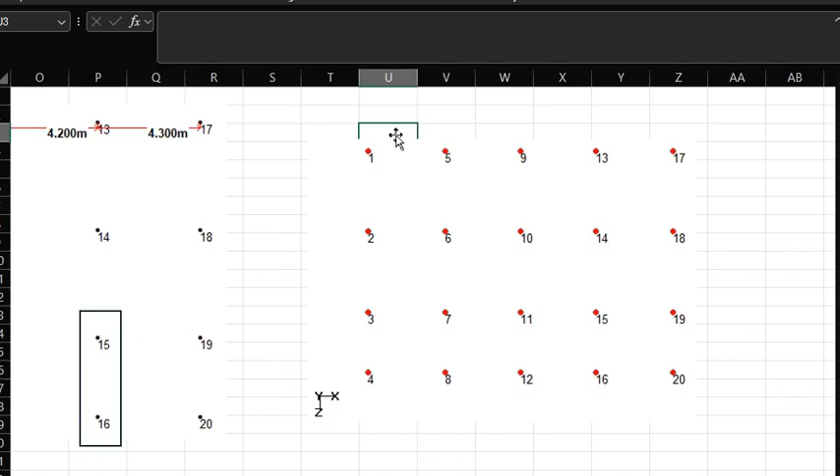Hello guys, so meron tayong foundation dito or footing reactions. So ito yung mga nodes, and then ito yung kanyang footing reaction. So mapapansin nyo, wala siyang moments.

So this is node 1, node 2, node 3, so forth and so on. And then ang kailangan natin dito yung vertical reactions. So ang dead load, dalawa yan, kasi yung dead load 1, ito yung self-weight. Tapos yung dead load 2, ito yung mga superimposed dead loads. So, ang dead load is actually the sum of these two.

And then, ito yung live load. And then, ang kukunin nating reactions based on earthquake is yung positive lang. In this case, ang kukunin natin dito ay yung 115.

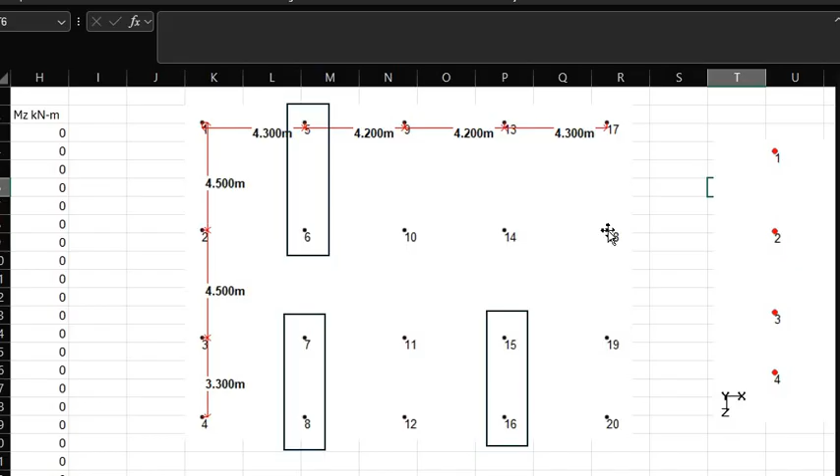Ngayon, ang ipapagawa ko sa inyo is tatlo, which is nodes 5 and 6. Si node 5 and 6, that is 4.5 meters apart, center to center. Kaya, ito ang pinakamahaba, 4.5 meters. Samantalang si 7, 8, saka 15, 16, 3.3 meters lang.

And then, ang condition dito kay 5 and 6 is, siya ay itong line na to, this is property line. So, ibig sabihin, yung column dito sa node 5 is nakadikit na sa property line. So, meron tayong edge footing dito. Ngayon, ang gagamitin nating footing dito is obviously strap footing. So, ang strap footing natin dito sa node 5, this is obviously edge, and then bahala ka na dito sa

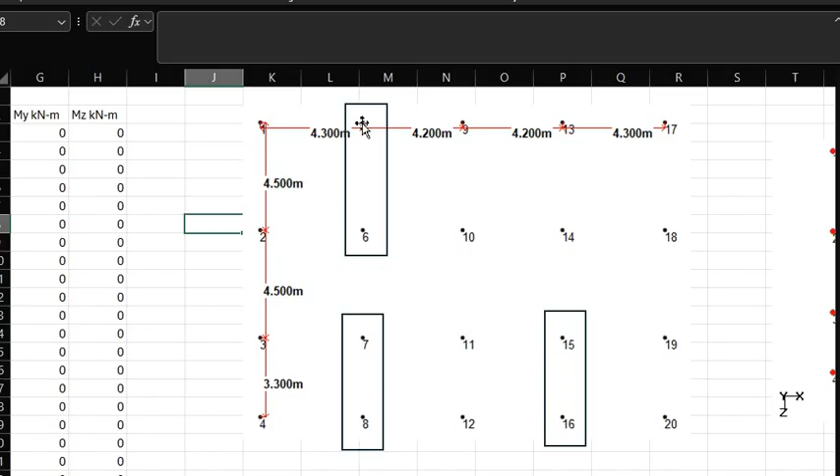node 6. And then, dito naman sa node 7 and 8, okay, eto siya. Ang gagamitin natin dito is combined rectangular footing. Okay, ngayon, ang limitations ni combined rectangular footing is dito sa node 7, ang maximum

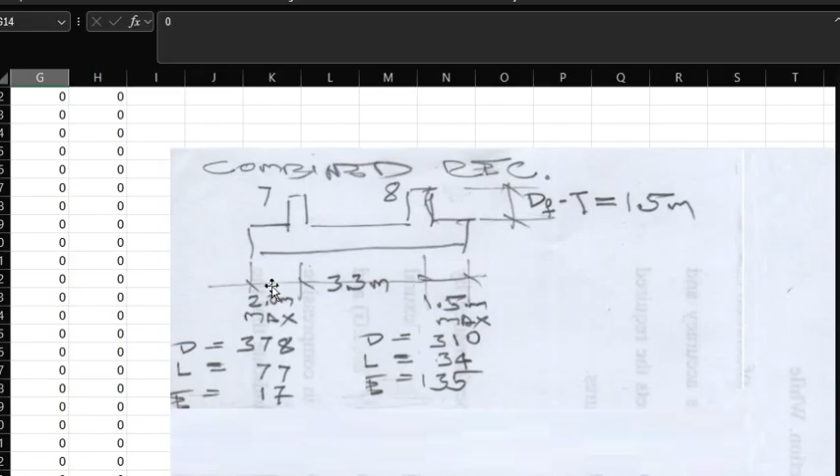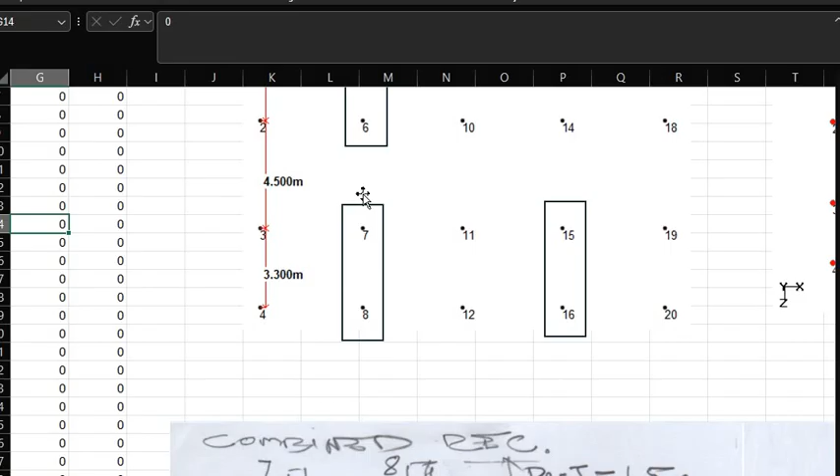dimension mo is 2 meters lang. Kasi dito sa 7, between 6 and 7, meron kang 4.5 meters. Okay? So, ibig sabihin, 2.25 yung gitna nito. So, nilimit ko lang siya ng 2 meters.

And then, dito naman sa node 8, somewhere here, ang maximum mo from center of column to edge of the footing is 1.5 meters lang. Okay? And then, between 7 and 8, column 7 and 8, you have 3.3 meters.

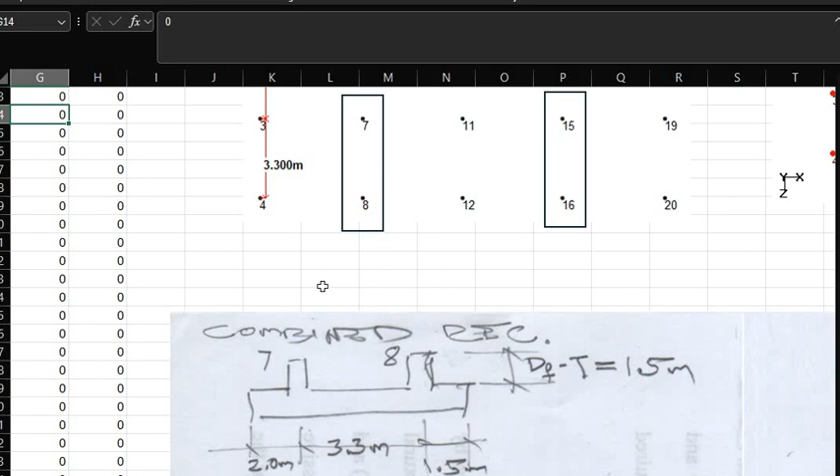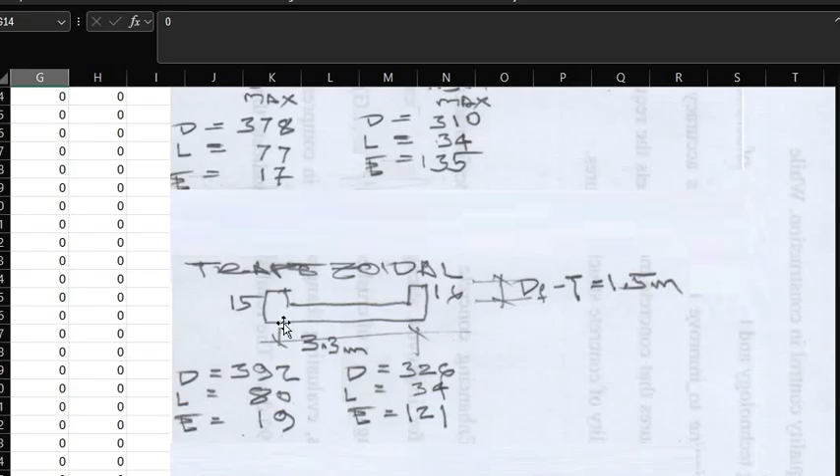Tapos, dito naman sa 15 and 16, ang gagamitin natin dyan ay trapezoidal footing. So, ang trapezoidal footing is both ends are edge footings. So 3.3 din yan, between 15 and 16, that's 3.3 meters.

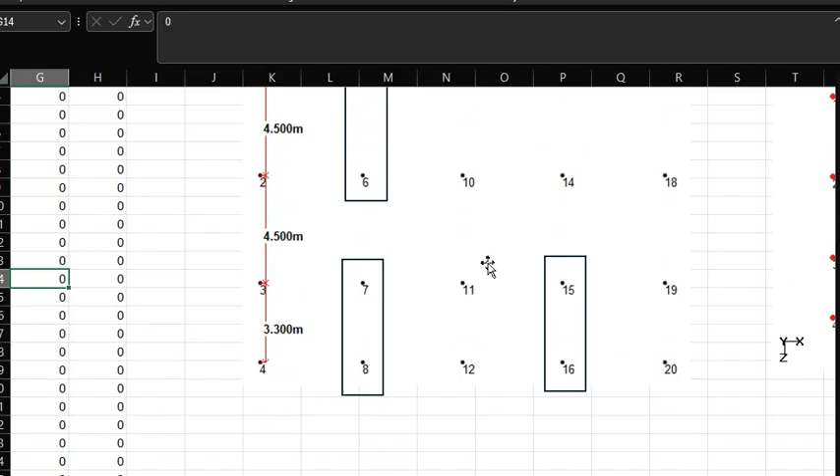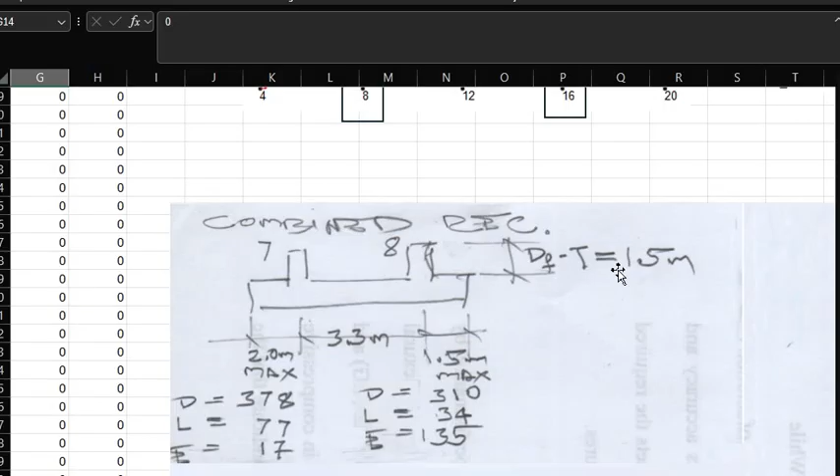And then in all three footings, mapapansin nyo na ang kanyang df minus t, ibig sabihin nito, excavation depth minus thickness of footing is 1.5 meters. So pare-parehas yan na 1.5 meters. Sa combined, trapezoidal, and sa strap, pare-parehas yan na 1.5 meters.

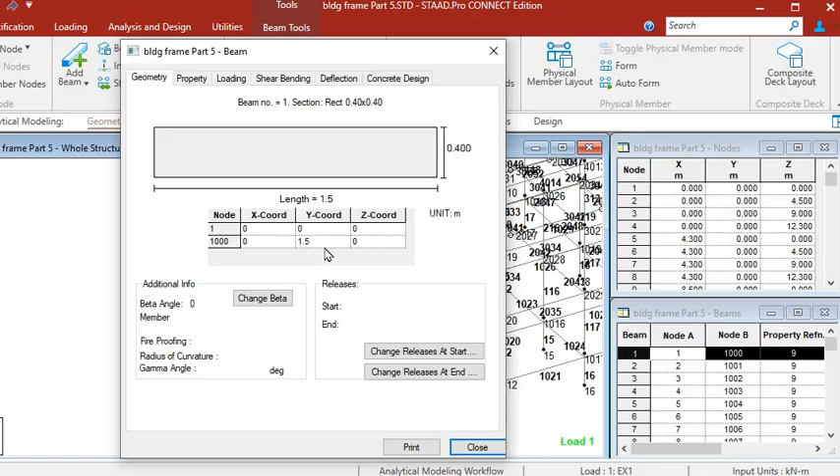For the reason na, ito yung pinagkuhanan ko ng reactions. Let's look at the height of this column. Ayan, that is 1.5 meters. Ang ibig sabihin yan, from the top of this beam up to the support, yung support na yan yung top of footing. Kaya, yan yung ginawa kong 1.5 meters. And then, ang assumption natin dito, lahat ng top of footing is on the same level.

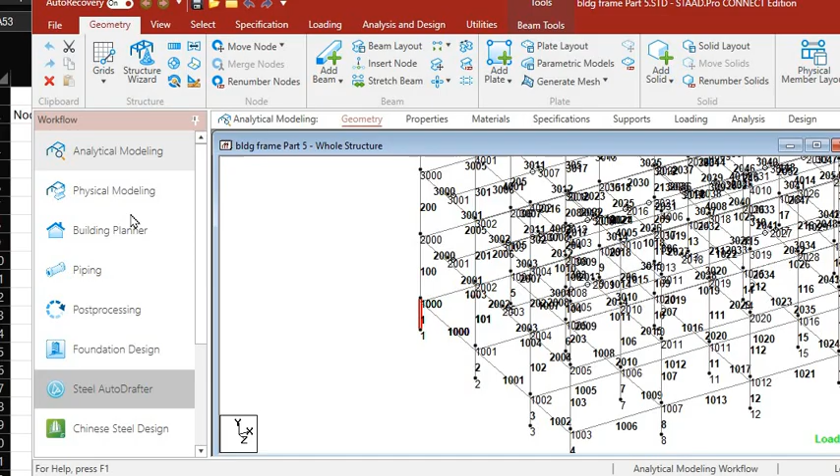Okay, so, pakita ko lang kung paano ko in-extract yung mga reactions na nanggaling dito. Okay, so paano ko in-extract yan? Dito sa post-processing. And then, reactions. Tapos,

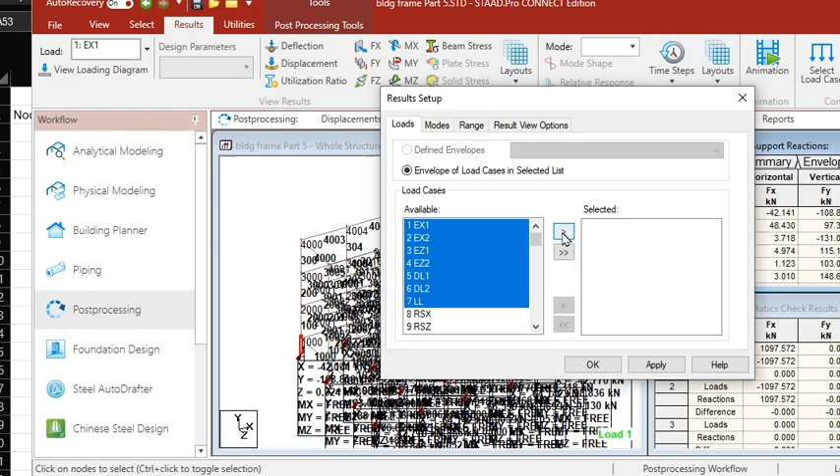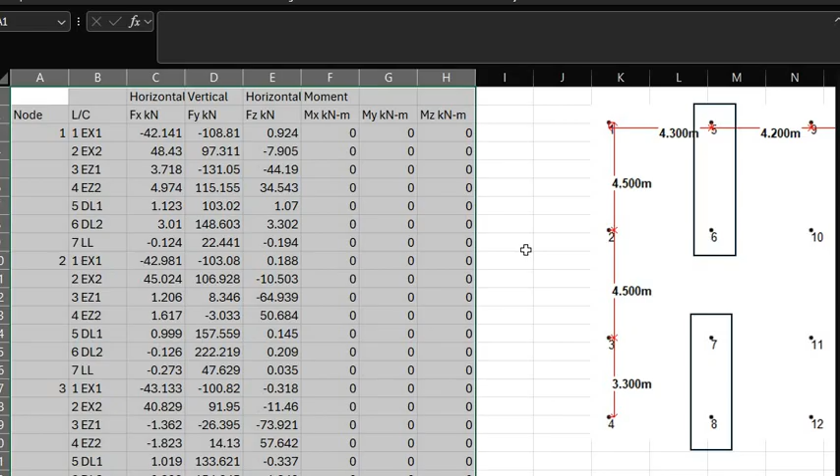result setup, and then double arrow left. Ang kukunin ko lang is EX1 hanggang live load. Yan lang. And then, single arrow right. Then, okay. Tapos, eto na yon. After that, you just copy that. And then, ipipaste ko na dito. Yan na yon. Okay? Now, let us extract or paano ko nakuha yung mga loads na ito, dead, live, and

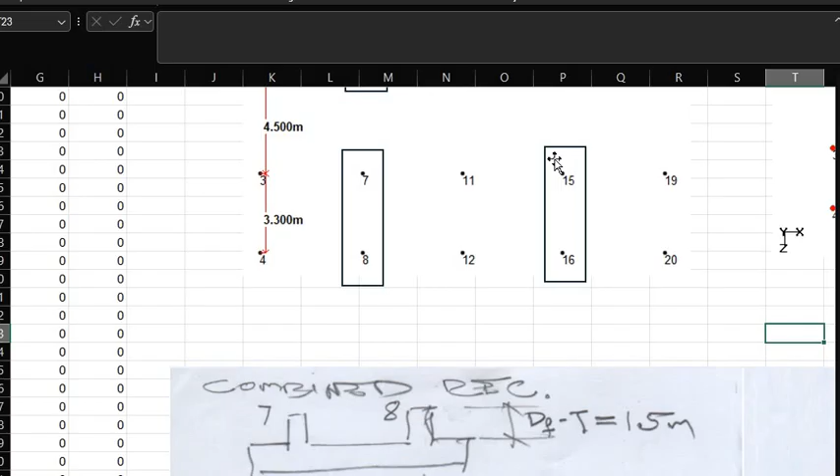E. So for trapezoidal, so that is nodes 15, 16. So ito si node 15, 16, ano? So punta ako ngayon kay trapezoidal. Dito kay node 15. Ayan siya. So, ang kukunin lang natin is, as I've said before, yung vertical reaction, Fy.

So, dito kay node 15, ang dead natin, ang dead load is the sum of these two. And that is 181 plus 210 will give you 391. Kaya, ginawa ko na siya na 391.

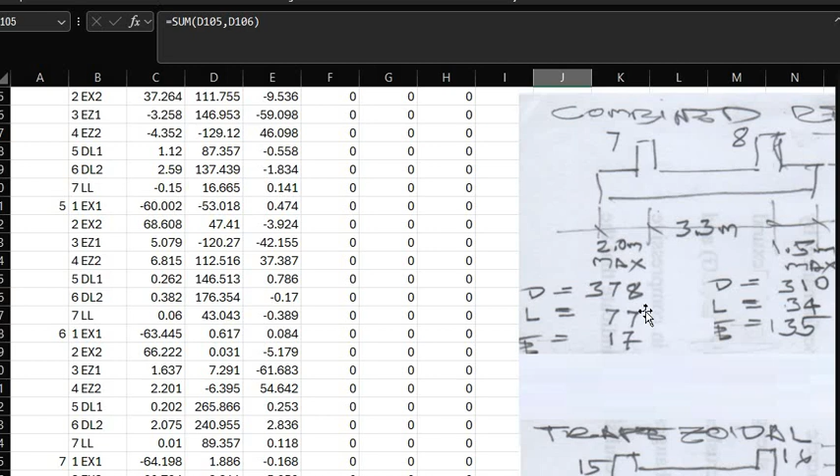Ayan, ginawa ko na siyang 392. Tapos, ang live naman, mapapansin nyo dito is 80. So kay 15, ito siya. Ayan, 79.25, ni-round up ko na siya na 80.

And then sa earthquake, as I've said before, ang kukunin lang natin is yung maximum na positive. So 18.64, ginawa ko na siyang 19.

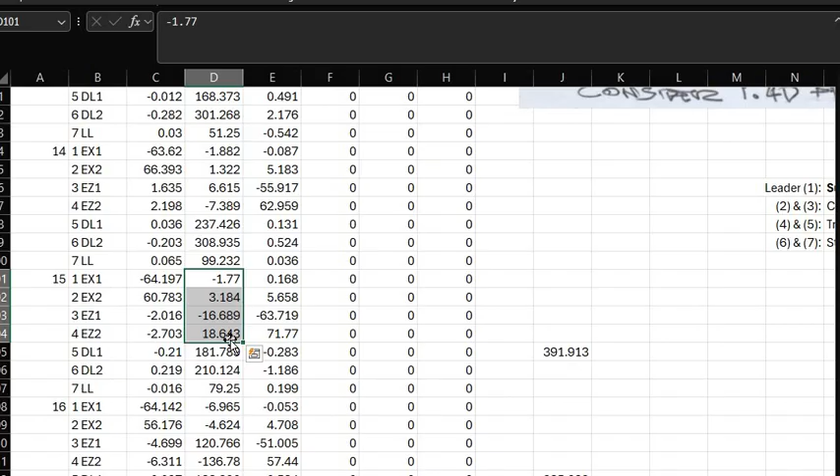Ngayon, bakit yung positive lang? Mapapansin nyo na yung dead tsaka yung live load, lahat yan ay positive reactions. Ibig sabihin, pataas yung kanyang direction. Siyempre, ang kukunin din natin sa earthquake is yung pataas din ng reaction. So that is 18.64 or ni-round up na natin siya ng 19.

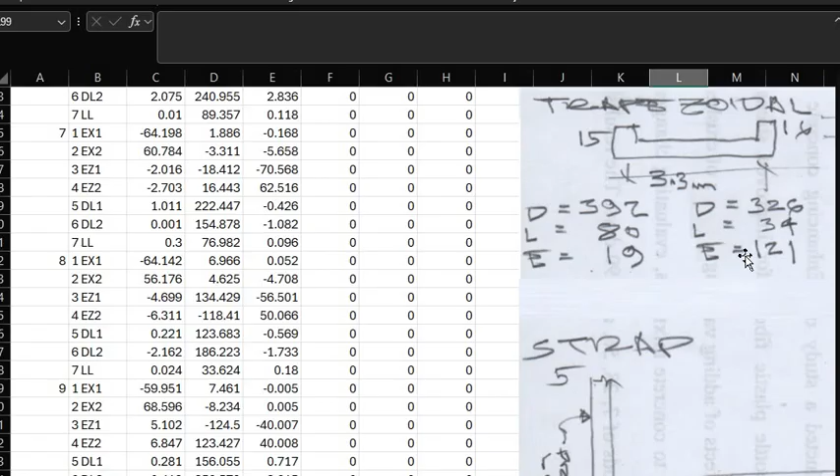Ayan, so dito sa node 16, ganun din ang procedure. Dito sa node 7 and 8, ganun din ang procedure. And pati kay strap, ganun din ang procedure.

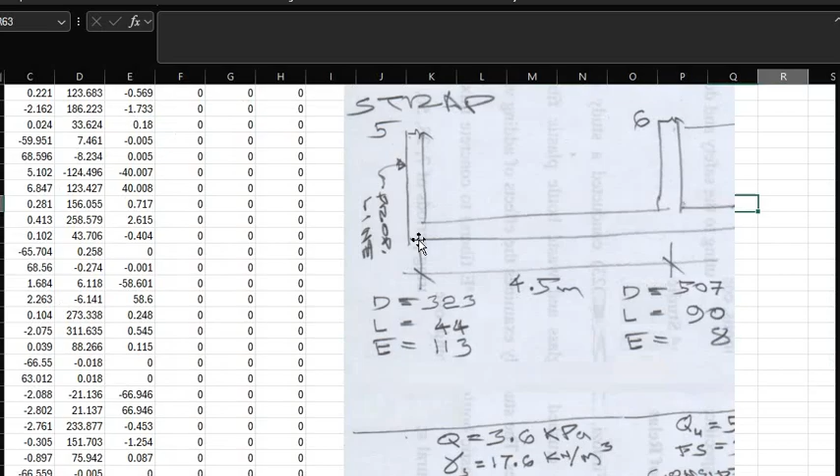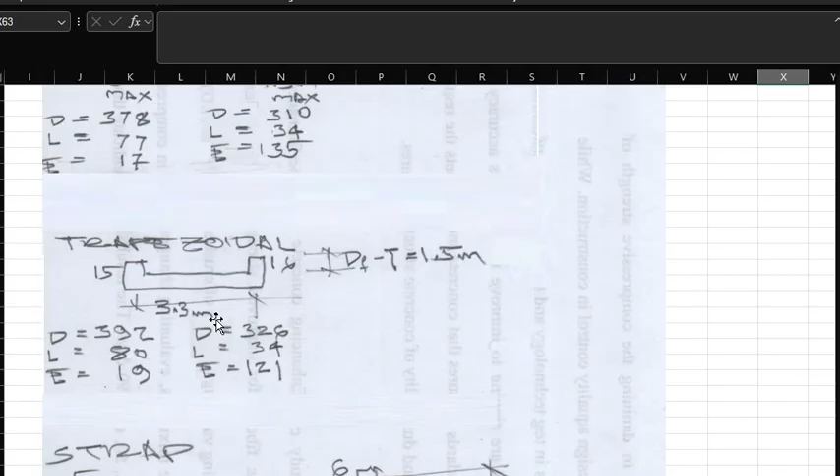And then the next set of data is, punta tayo dito kay trapezoidal. In between columns or between nodes 15 and 16, that is 3.3 meters. And then kay strap naman, property line yung edge ng column. Okay, property line, ano? And then 4.5 meters yung between column.

Tapos dito, bahala ka na kung ano ang i-design mo. And then, common properties, yung surcharge Q, that is 3.6 kPa, or this is derived from 6 inches na slab. And then unit weight of soil, 17.6 kilonewton per cubic meter. Ibig sabihin, you have to consider the weight of soil.

Tapos, ang Q ultimate is 570 kPa. And then may factor of safety ka na 3. Ibig sabihin, ang Q allowable mo dito magiging 190 kPa. And then ang clear cover, since it is directly cast to earth, is 3 inches or 75 mm.

And then maximum aggregate size is 65 mm. And then unit weight of concrete, 23.54. Tapos, lahat ng columns is 400 by 400 mm, with 8 pieces na 25 mm diameter.

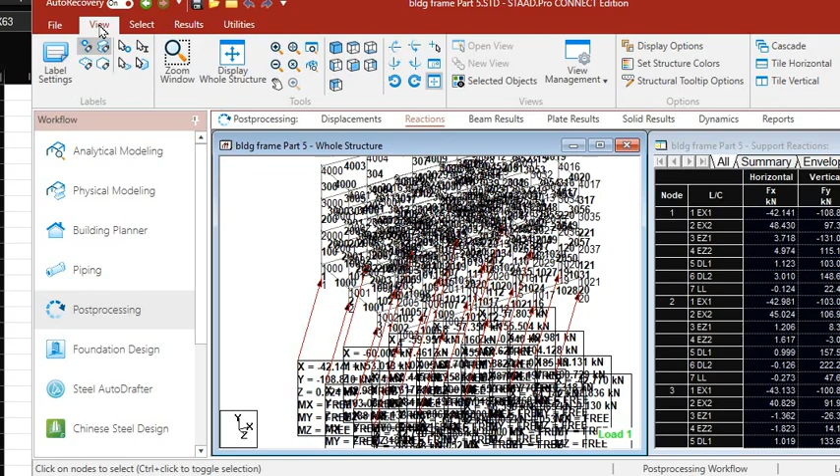So now, let me show you kung paano ko nakuha yung 400 by 400 mm. Nanggaling din yan dito sa STAAD. Ayan, so if I will click properties, dahil yan yung dinesign ko, ano?

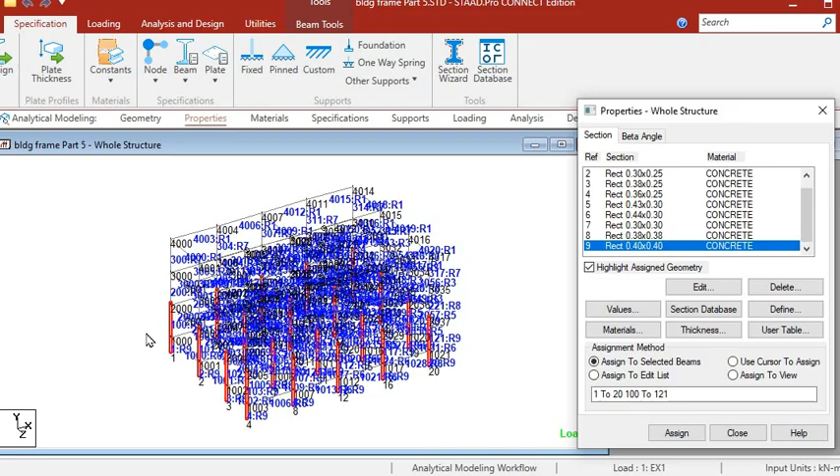So ayan, so roof beam, tie beam, ayan, third floor columns, second floor column, and finally first floor column. So 400 by 400, and this includes the footing columns.

Ayan yun. Next is, i-consider natin yung 1.4 dead plus 1.7 live sa combinations. And then for the 3 footings, wag na tayong gumamit ng orthogonal effects.

And then ang concrete natin is 24.13 megapascal para sa lahat ng concrete, so this includes columns, footings, and strap. Ganon din sa steel, ang ating steel grade ay grade 40 or 276 megapascal, this is for columns, beams, and strap.